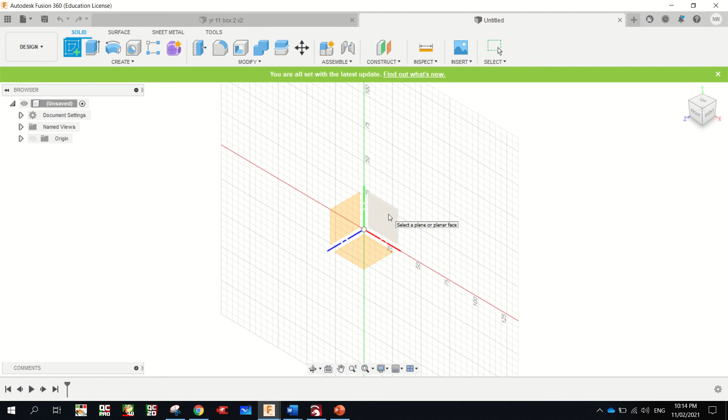So in Fusion, let's hit create sketch. I'm going to start drawing from the front view. Rectangle tool, and remember there's no click and drag, it's just click, let go of it, move your mouse in the direction you want it. The highlighted dimension is the one you can enter first. We're going to type that one in as 19, tab, and the width of our cabinet, 630 mil. Enter. Click E for extrude.

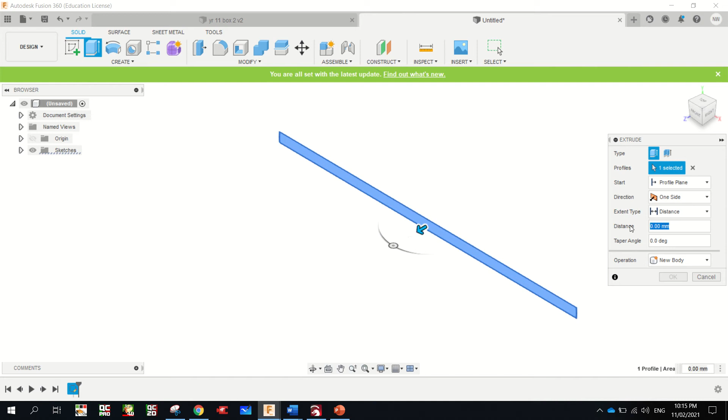Just going to zoom out. Now you can just click and drag that arrow, or you can type in the distance here, and the depth of our cabinet is 85 millimeters. Enter. Okay, that's our top piece.

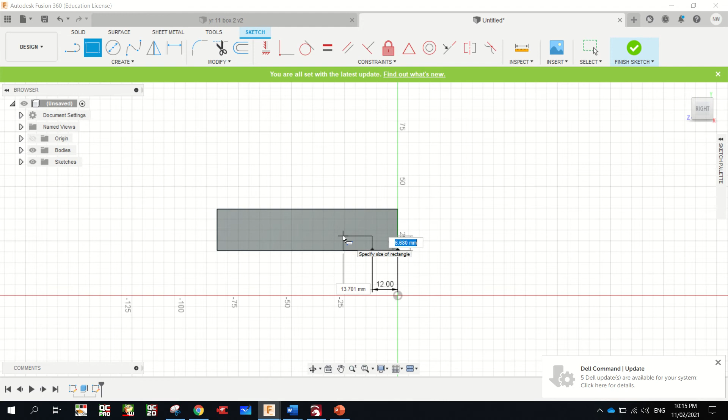First thing I'm going to do is draw in a groove that our backing board is going to go in. Create sketch, I'm going to draw on this face here. I'm just going to draw a line in from the back here, going in 12 mil, enter. And from that point there, your rectangle tool, click, I'm going to move up that way. The depth of the groove there is going to be 10 millimeters, tab, and the width is going to be 3 millimeters. Enter. Okay, I'm going to grab that line that I drew, click on it and click delete on the keyboard.

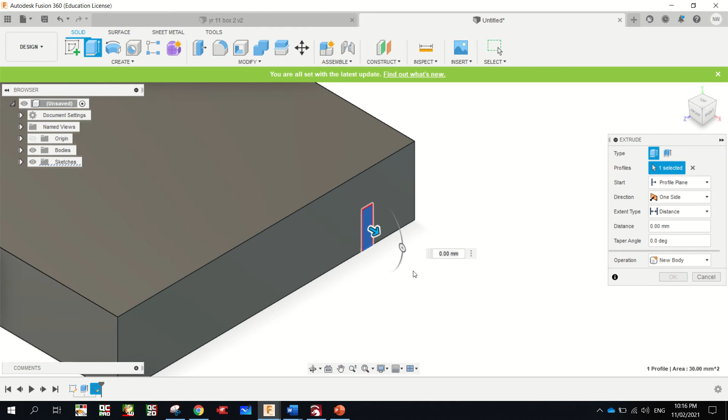I'm just going to zoom in, click on that shape there, click E on the keyboard to extrude. I'm just going to spin it side on, there we go. And I'm going to extrude it back that way. Now you can type in minus 630, or extent type here, distance. I'm just going to go all, and it should go the full distance. Click OK, zoom out, just going to spin around my shape. Now you can see it's gone the whole way through.

Okay, now this is the top piece of our dartboard cabinet, and in the top corners we're going to do a finger joint. We're not hand cutting, we're going to do it on the Gifkin.

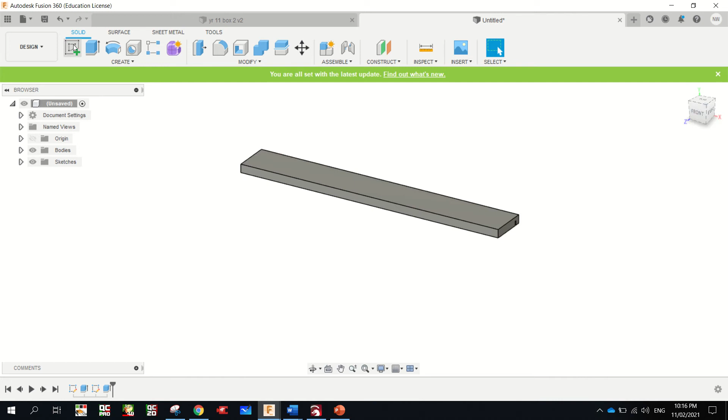So sketch, I might just draw it on the top, rectangle from there down to there, so it's the 85, tab to get to the next dimension, the width of our timber going into it, 19. Zooming in, now I'm going to go... Now the width of these in our drawing may not be exactly the same as what they are on the Gifkin, that's fine.

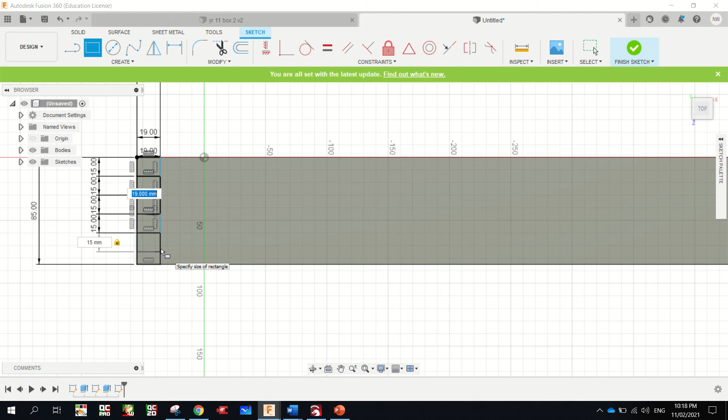So I make these about 15 mil. Enter, click, move in the direction, 15, tab, 19, enter, enter. Click, move in the direction, I want 15, tab, 19, enter, enter, locked in. 19, tab, 15, enter. Tab, 19, it's already that, so enter, enter, lock it in. You'll notice that first one's skinnier, but when we put it on the Gifkin we'll make sure the first and the last one are even, but for our drawing that's fine.

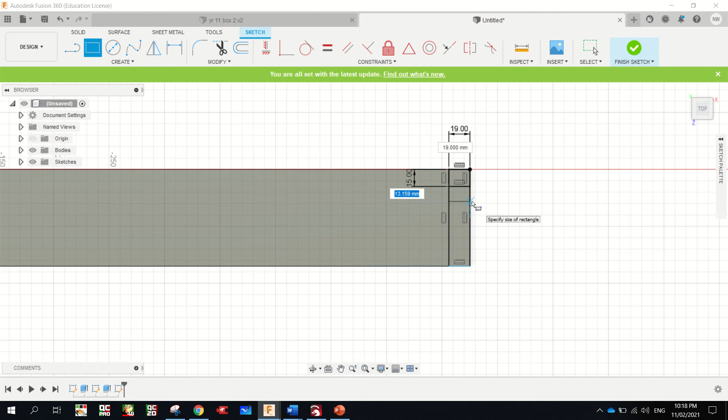Okay, I'm going to come down here and do the same thing. There, back this way, it's the 85, so tab and the width 19, enter, and we'll start drawing our fingers. 15, tab, 19, enter, enter. Rectangle, start point, go that way, 15, tab, 19, enter, click, move in the direction we want. Remember, we're not clicking and holding, it's just a click. 15, tab, 19, enter, enter, click, I've moved my mouse, 15, tab, 19, enter, click, it's gone 19, tab, 15, enter.

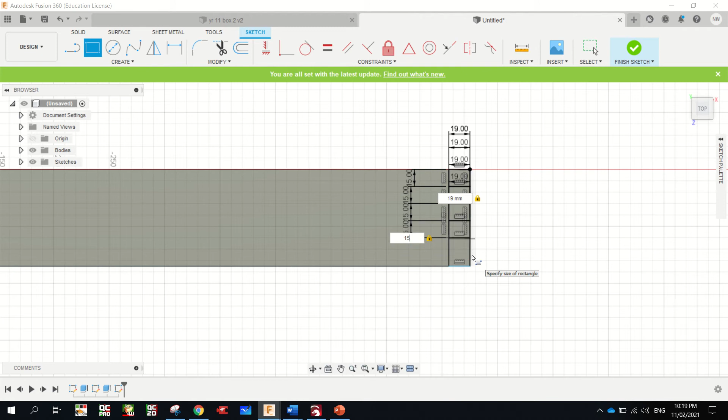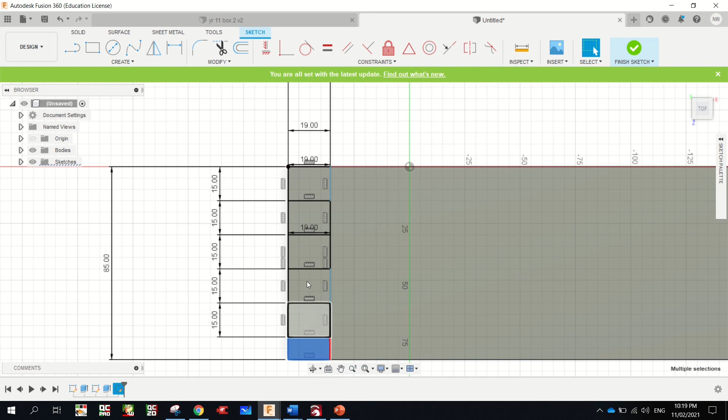Alright, now I'm just hitting the escape button on the keyboard, and I'm going to zoom in. I'm going to get that one, hold shift on your keyboard and get that one, and I'm going to get the front one. I'm going to do the same on this side. So it was that, oopsies. See what I did? Forgot to hold shift. Shift, shift, zoom out. I'm going to zoom in over here, keep holding shift. Okay, I've let go of shift now.

I'm going to click E on my keyboard. I'm just going to spin it. And I actually want to go this way. I can just type in -19 here, or just go all. Enter. Fingers are done.

Sorry, you can probably hear my dog in the background.

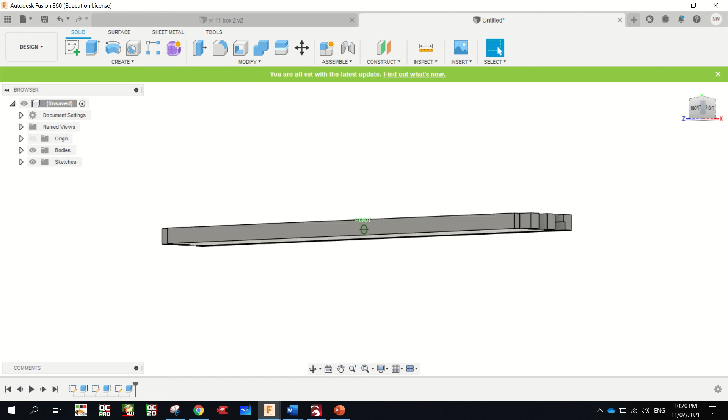Okay, top piece is done. Okay, so now we're going to have a look at the side piece.

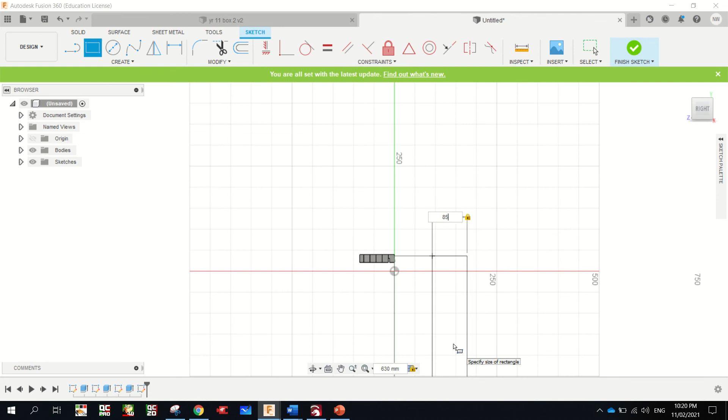So, sketch, side plane, rectangle, I'm just going to draw him out here. Now he is going to be 630 as well, tab and 85 deep as well. E on the keyboard, we're going to extrude him the thickness of our timber, 19.

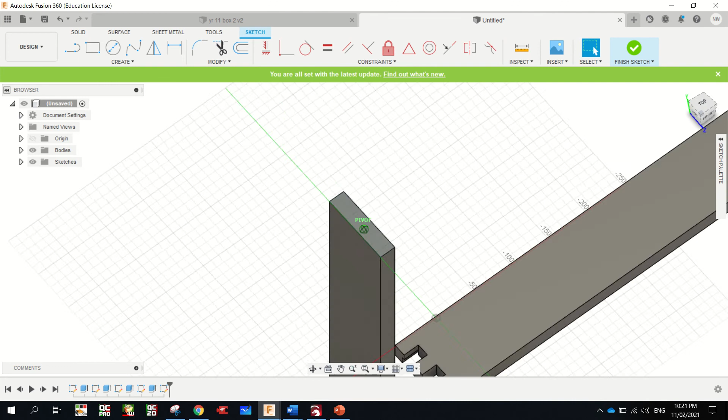And we need to draw our groove in first, to match that one that's underneath there. So sketch on the top of this piece. Oops, that made me dizzy a bit. Where's the groove? That end. Alright.

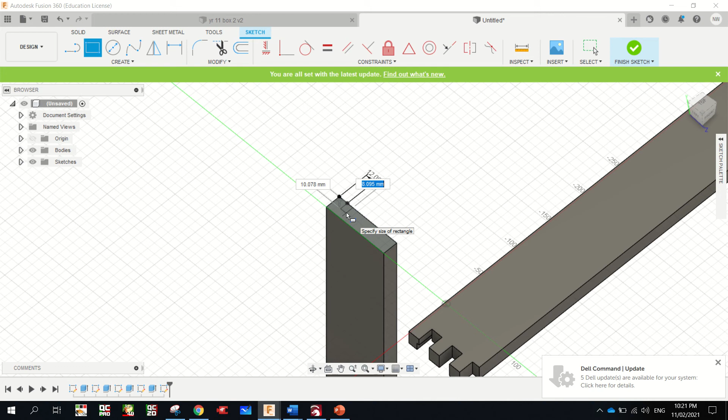Okay, line in that corner. We went in 12, enter, rectangle from here. Now he's 3 mil wide and 10 mil deep. Enter, zoom in, grab him, E for extrude.

I'm going to go that way, extent type all. Okay, done. Okay, time for the finger joints in the top.

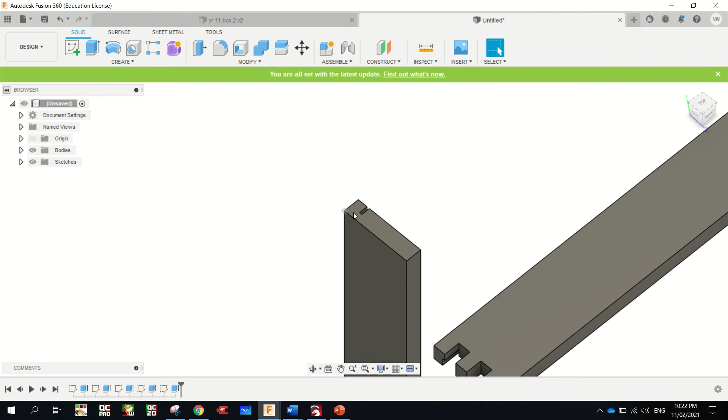We're going to start from the end where the groove is. Sketch on that face there. Start from here and we're going to go 19, tab, 15, enter. Again, 15, tab, 19, enter, enter.

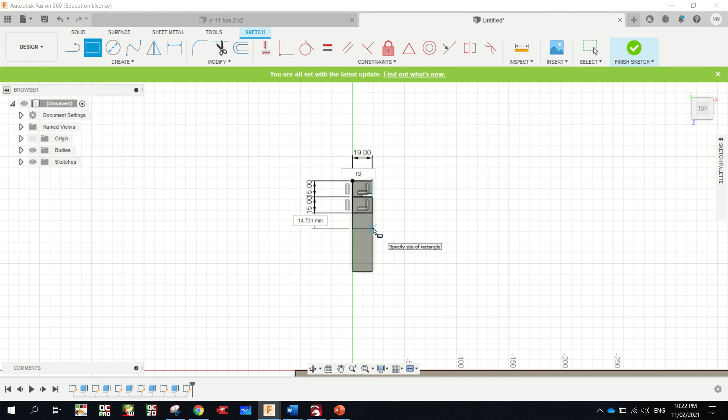Tab, 15, enter. Tab, 19, enter. One more. 15, tab, 19, enter. Done.

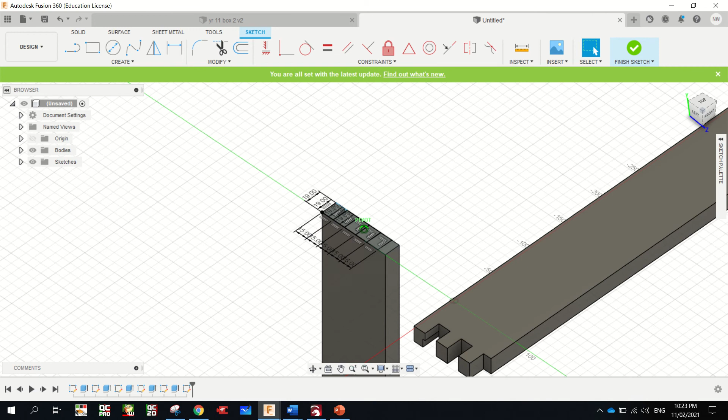Now we have to delete or extrude that one, hold shift, that one and that one. E for extrude, and we're going down the thickness of the timber, so you can type in here -19, enter. Okay, that one will slide into there.

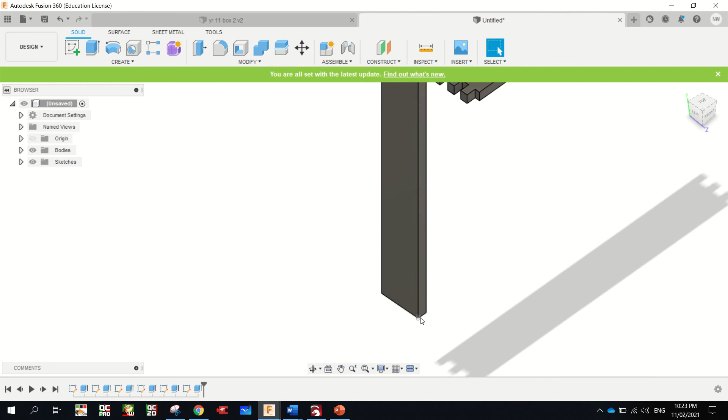We've got one more joint to do down here, and it's not going to be a finger, it's going to be a rebate. Sketch on that face there. We're going to a depth of 10 mil, tab, 19 mil, enter.

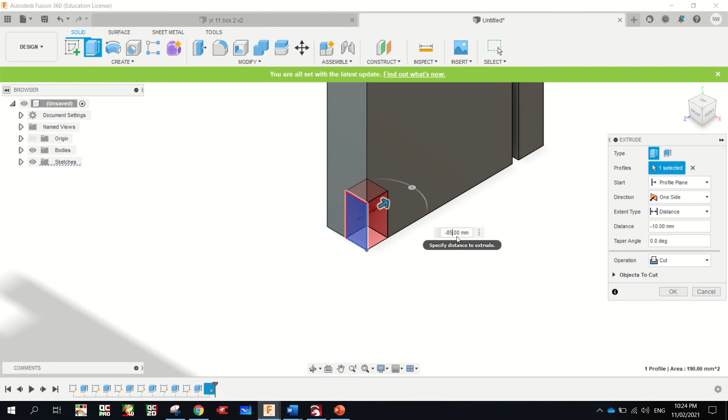Select that by clicking on it, then click E, spin it a little if you want, see the arrow, tell it we're going back that way, and it's going to be -85. You could try just going extent type all, but I'm not sure if it'll stop there, like on that line there, or there, so just go -85, enter.

That's that piece done. Now we need to draw that again, but the reverse, so quick easy way to do that, just click on it once, then right click, move copy.

Faces, no, it's a body, a selection, that. Move type, we'll just translate, which from maths you know means to slide. And we're going to create a copy. There we go.

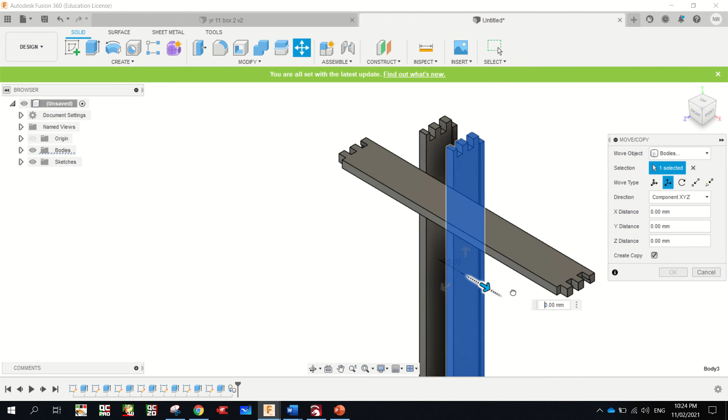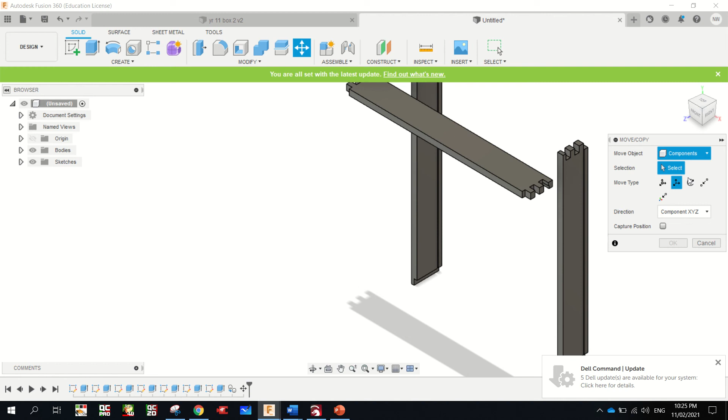Done, click OK. Now we need to spin this, and this might get a bit tricky. Right click, move copy, faces, component. Oops, not a component, sorry, it's a body. There we go. Now we can select it.

We're going to go rotate. Select the axes, we need to pick one of the ones running straight up and down. Okay, grab that dot, spin him around. It needs to be 180. You might land right on it, otherwise you can type it in there and click OK.

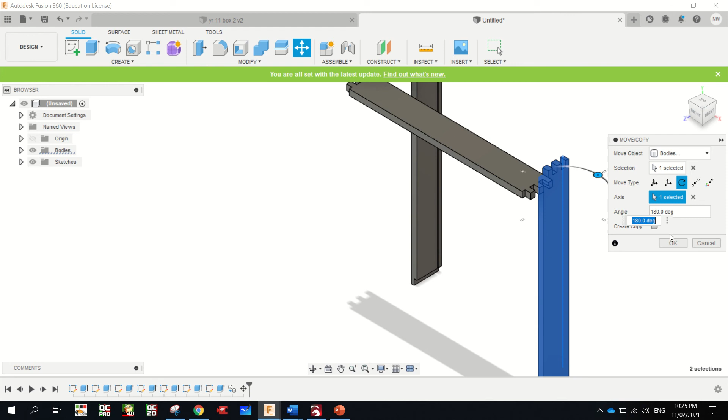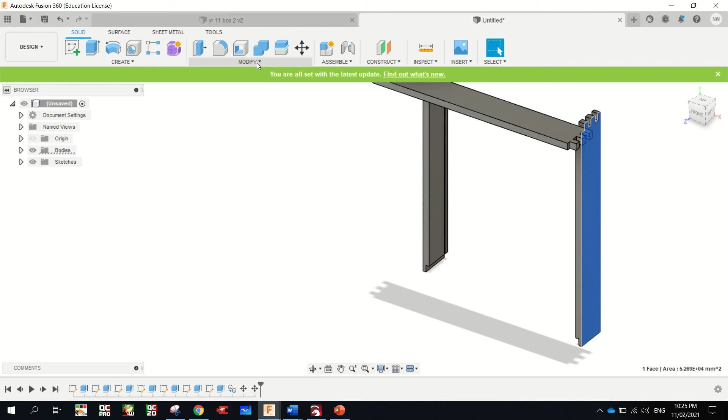Now the problem is that our groove's on the front. So, hopefully... quick way to do this. Could probably try and mirror it, but let's do it this way.

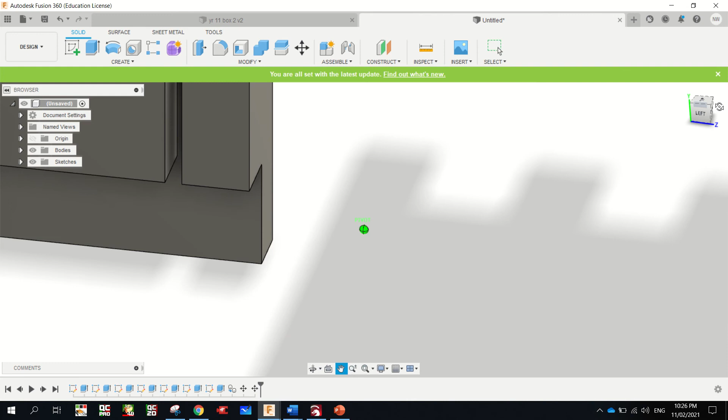I'm just going to zoom right into that groove. Whoops. Might pan across, that might be easier, just want to see the bottom of it. Ah, okay, never mind, I was just going to pull it out to match that face.

Let's do a mirror, okay, I'm just hitting escape to turn my pan tool off. Now I'm going to go create, mirror, and yep, it's a body, object, this one, mirror plane, select, and I'm going to pick that one. And I'm not going to go join, I'm going to go new body and go OK.

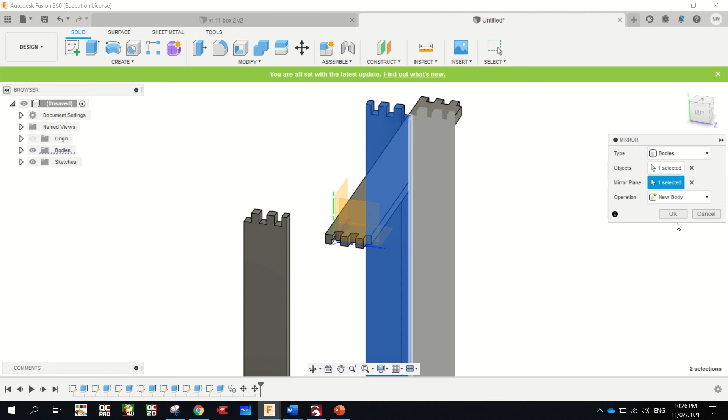Alright, now this one here, I'm just clicking on it and there's something selected in my bodies folder, it's body 3. Now I can turn that off and on. I don't need that one anymore, I'm just going to delete it. So right click, delete. Yep, delete. Whoops.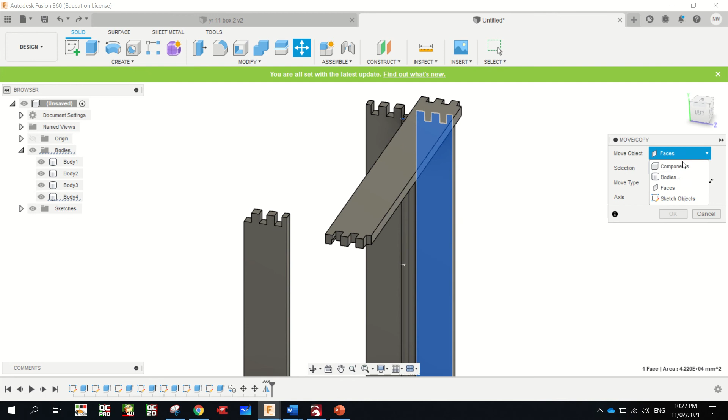Might just move this one away from it first. Right click, move copy, bodies. Move type, translate, select, it's that one, slide him that way. Alright. Click OK. Body 3, hopefully it doesn't delete body 4 as well. I think it will. Undo.

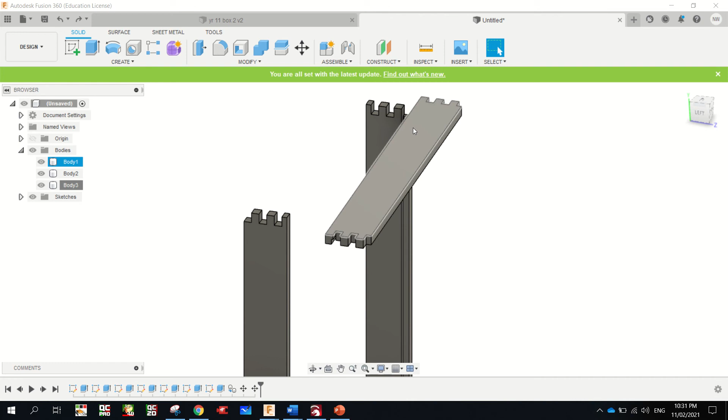Alright, I've had to think, guys. For all the messing around, I think it's actually going to be quicker to draw this one again, because if we just mirror it, it'll actually end up showing like this one that will look hidden. When we export it to make our orthographic and set of working drawings, it'll still show it up. So instead of running into those problems later on, I'm just going to delete that body. Right click, delete. Yes, I'm sure. Okay, and I'm going to draw it again.

So sketch, this view here, it won't take long at all.

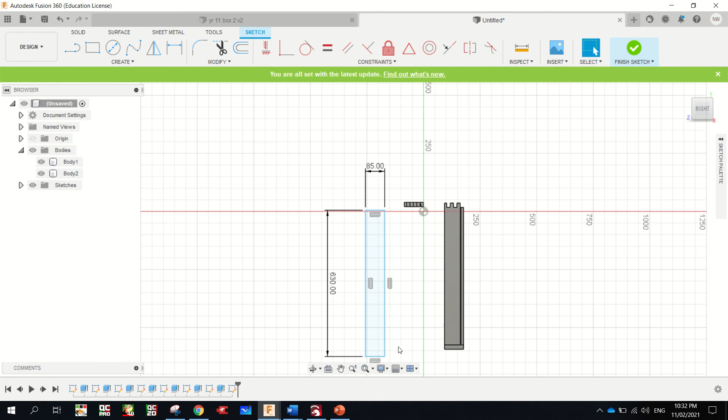Rectangle, here we go. He's 630 long, 85 wide. Extrude, we'll spin him a little. There we go, and he's 19mm in thickness.

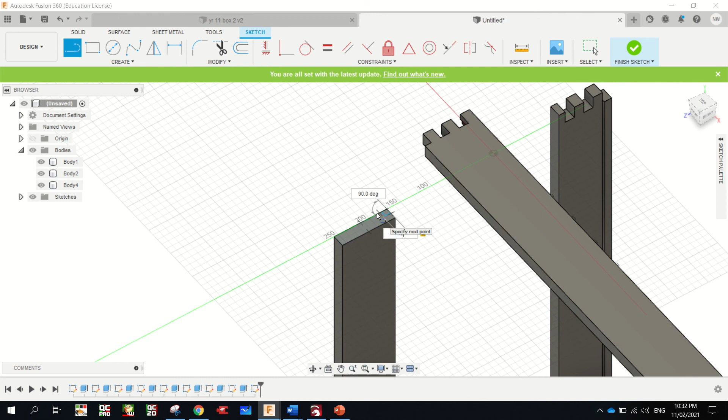We'll draw our groove on first. Alright, so I've got to get my groove on this side here, back 12mm, enter. Rectangle from here across 3mm, tab 10mm deep, zoom in, grab that, E for extrude, we're going to go down distance all, okay, and we'll start drawing our fingers on there again.

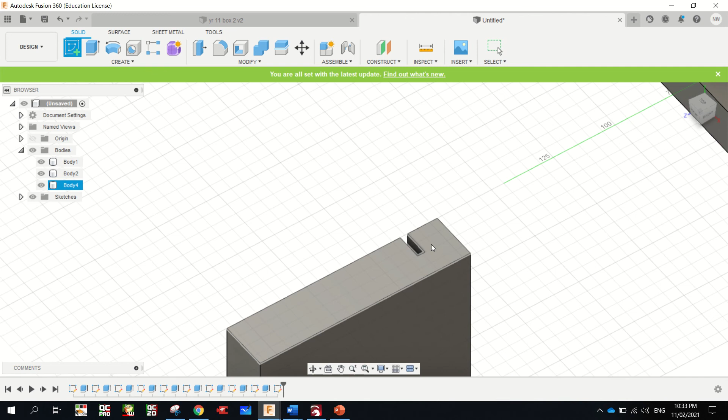Starting from the groove end. 19, tab 15, enter. Sorry if you can hear my dog again. 15, tab 19, enter.

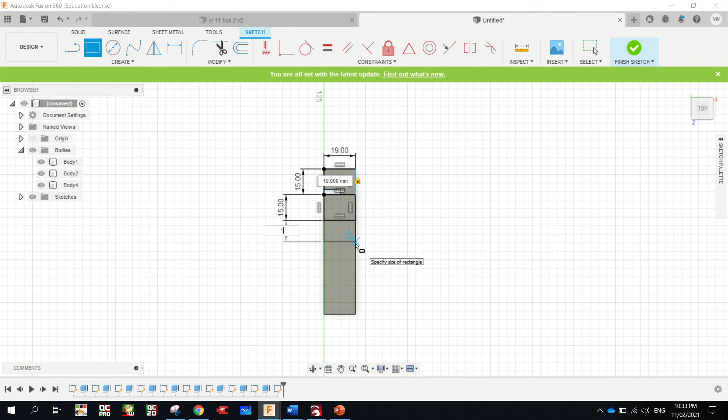Oops, I'm on line. Rectangle. 19, oops. Yep, that's fine. 15, enter. Rectangle. It's the highlighted one first, so 15, tab 19, enter. One more. 15, tab 19, enter. Check which one we've got to get rid of.

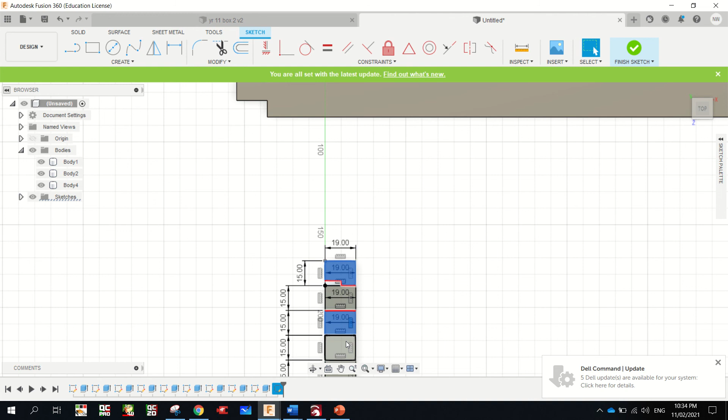We've got to get rid of the first one. That one. Shift to multi-select. Zoom out. Shift, E, just spin him side on. And we want to go back that way, a depth of -19. Enter.

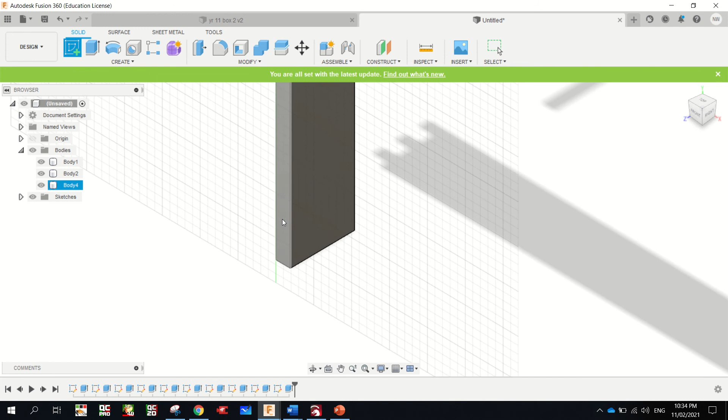Home view. Alright, and now I've just got to draw the rebate on. Sketch. This time from this corner. Depth of 10, then 19. Remember, tab to get to the other dimensions. Enter.

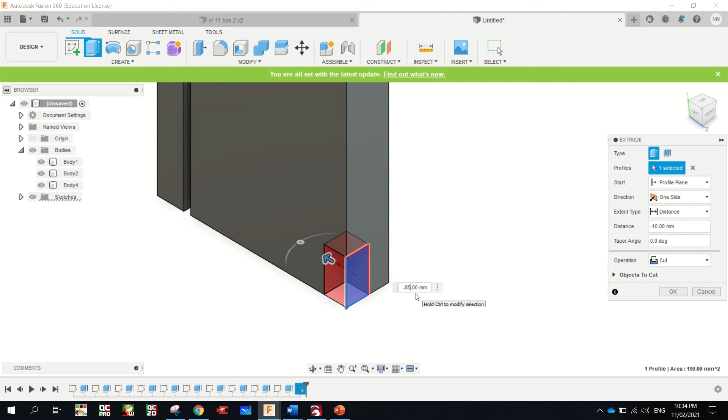Click that. E for extrude. You can spin him side on. Drag him back, depth of our cabinet there, -85mm. Enter. There we go. That didn't take too long at all. Okay.

Now we've got one more piece to draw. But first I'm going to put these three parts together. So just remember, go to your bodies folder, right click on the heading there, create components from bodies. There we go. Always have to do that first before joining things together. And I'm going to go click on that, then right click, move copy.

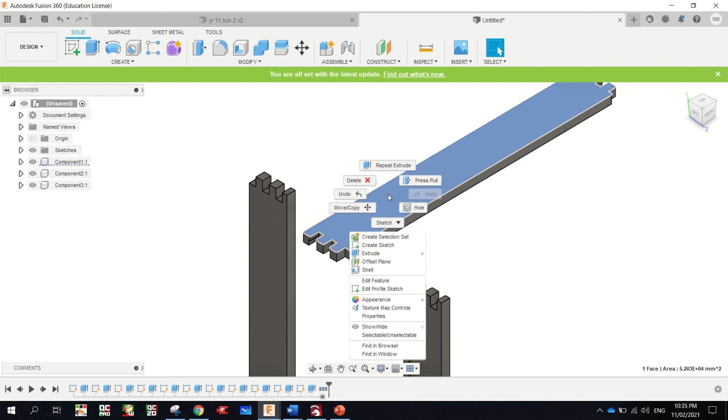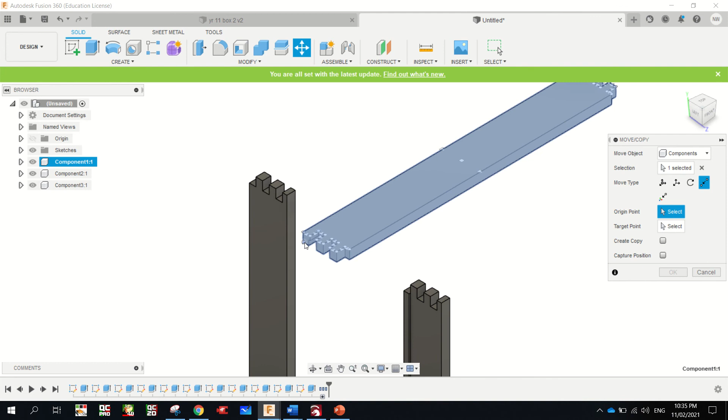It's now a component. I'm going to go from point to point, origin point. I'll just say that bottom corner there is going to line up with that corner there. Better. Origin point from that point there to that point there. Looks good. Click OK.

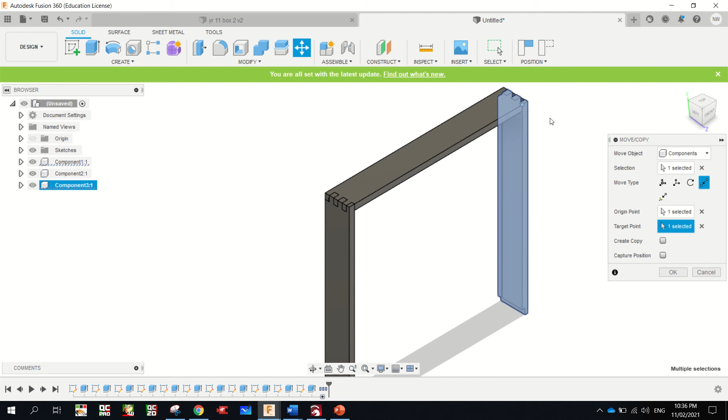Alright, same one for this one. Click on it, then right click, move copy, change it to components, select the one you want to move. It's point to point, origin point. I'll go from there, and that should line up there. Zoom in, yeah, looks good. And click OK. And just check your grooves line up, that you haven't drawn one on the wrong side.

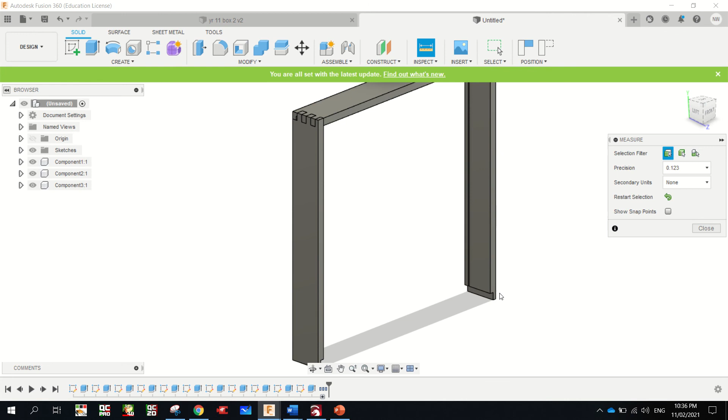Okay, now we're going to draw the bit that just sits in the bottom here. So you can probably figure out the length in your head, but otherwise go to inspect and measure. And we go from that point there, escape, to that point there at 612mm. Okay.

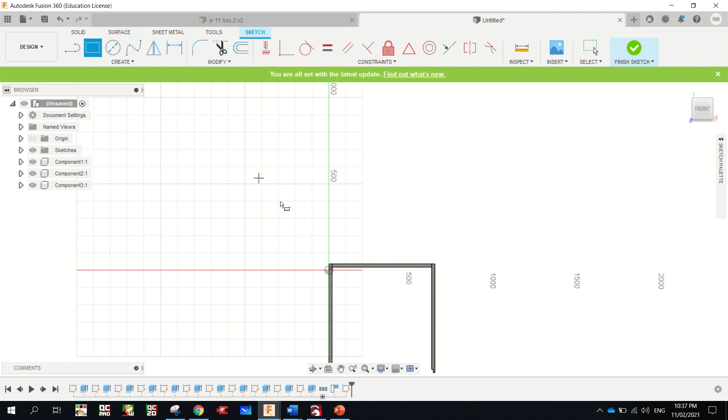Close. 612. Front view. Capture. Always click capture if this ever pops up. Rectangle, doesn't really matter where you draw it. It's 19 thick. 612mm. Enter. Zoom in, click on him. Click E on your keyboard.

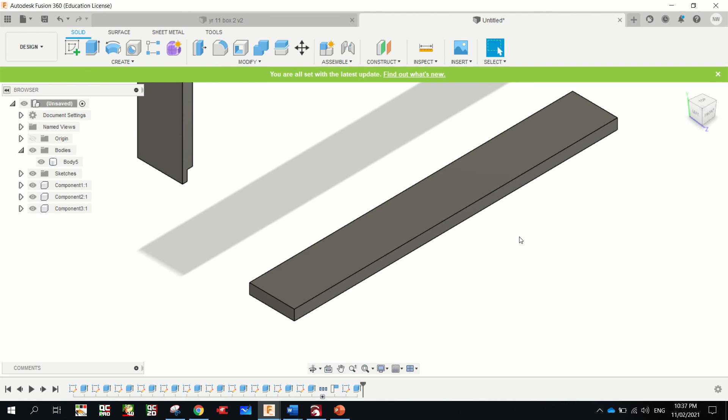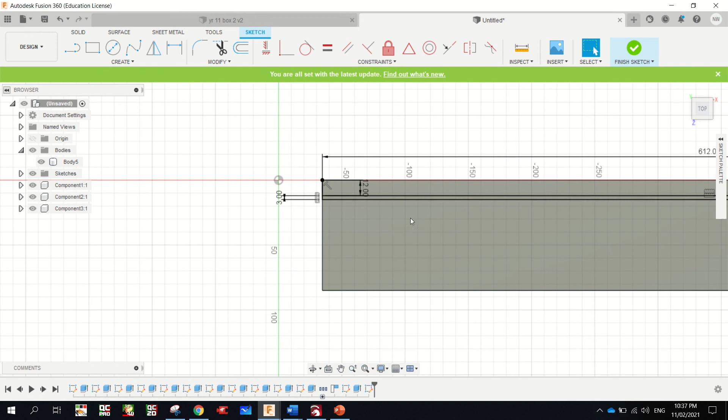You can spin him side on. Just pan across. There it is. Escape, turn off pan. Now we're going back that way. Hey, look at that, perfect, -10. Click OK. Alright, that's ready to go in. Just going to click home. That's better.

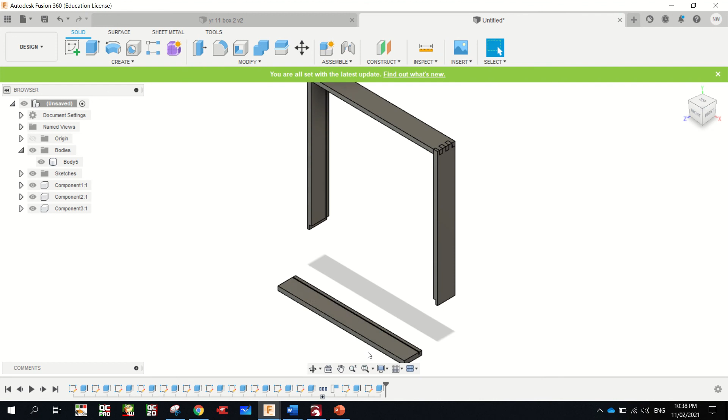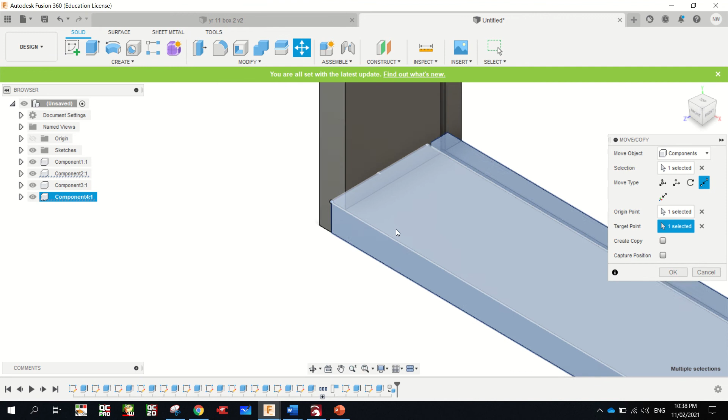Here's a body still, so right click, create component. Click on him with the left button, then right click, move copy. Use a component. Select him. Point to point, origin point. I'll just go for that corner to line up with that one. Just zoom in and make sure you got it right. Yep, grooves all line up, that's good. And click OK. That's the carcass of our dartboard.

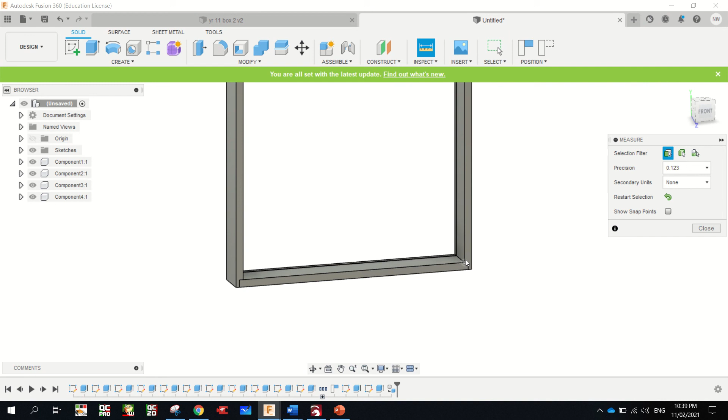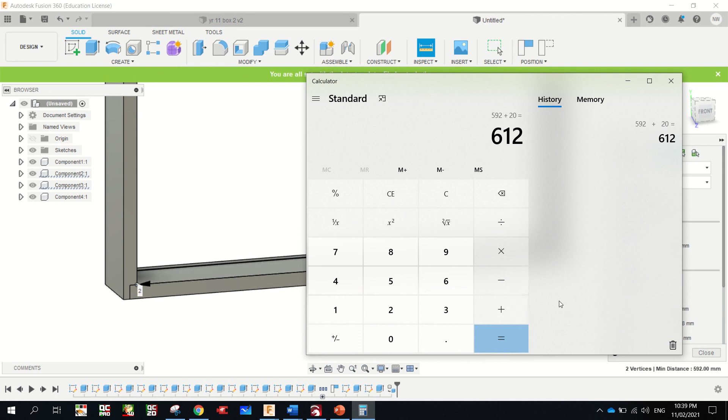What's left to do now is cut our ply, well, draw our ply that will go in there. Okay, now I'm going to measure again, inspect, measure, and go from that point to that point. So 592, and we know the depth of our groove is 10mm each way. So if you grab your calculator out, 592 plus 20 equals 612. Easy. Okay.

So, sketch, front view, capture.

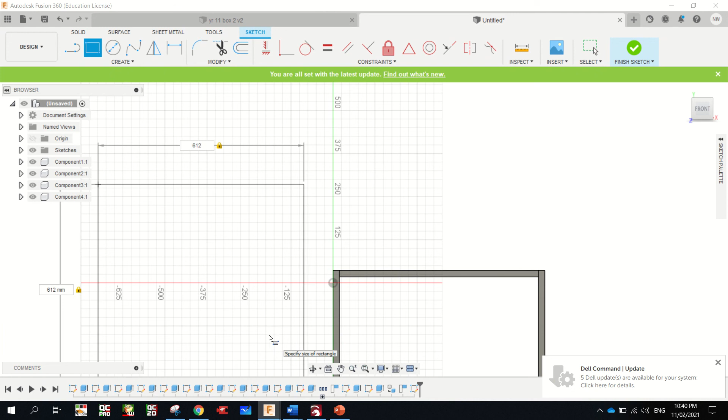We want 612, tab 612, enter. Select him, extrude. You can turn him side on if you want to, and he's going to be 3 mm.

Now this is a little bit tricky. We've got to get him into that groove. Okay, convert him to a component. Done.

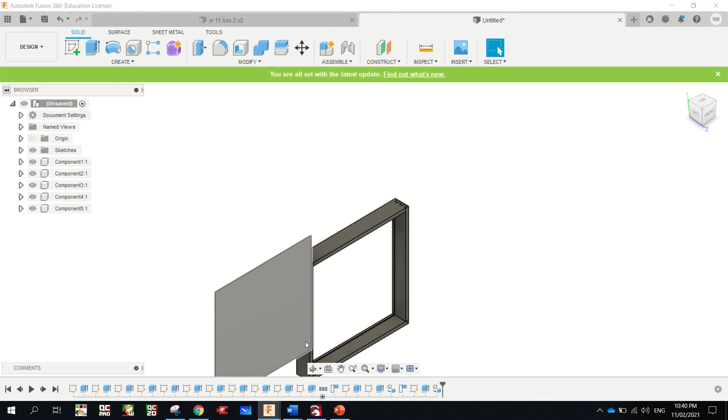Now right click, move copy, component. Select him. We are going to go point to point to start with. Alright, now origin point. I'm just going to go to this front corner here. And I'm going to align him to there. I know that's not right. Okay, click OK. Now I have to do it again 2 more times.

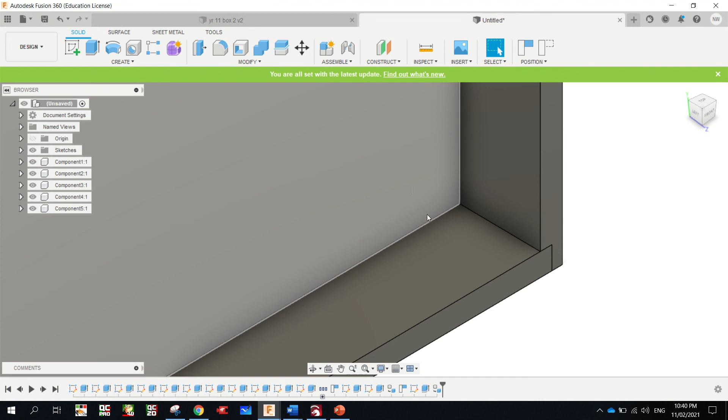Right click, move copy, component, select him, that one. I'm going to translate this time.

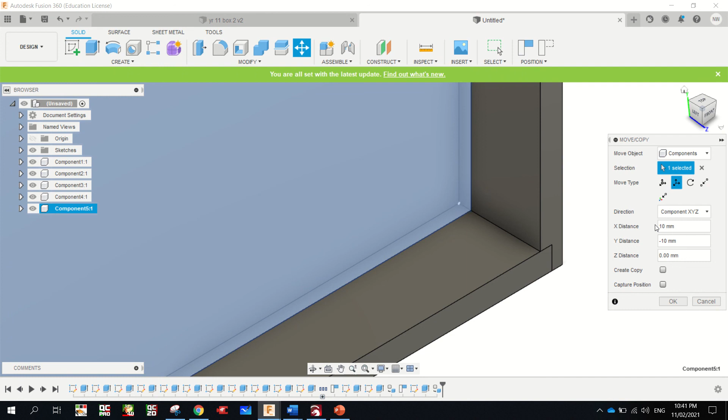Now I'm going to move him downwards, so I'm going to go to this widget. Down should be Y, so see how Y runs up and down? It's got the Y at the top here. I'm going to go to my Y distance and go -10, and my X distance, which would be out that way, and that should be 10. Yep. Click OK. That's in there perfectly.

Now, I want to talk to you about this gap at the back. I left this little 12 mm ledge the whole way around the back because we're going to put a bit of timber in across here that'll secure into our side pieces so that you can hang this on a wall. If you were just to screw it in from the ply, it could peel off the back of your cabinet. The ply would be stuck to the wall, but your cabinet would fall down. That's not ideal. Okay?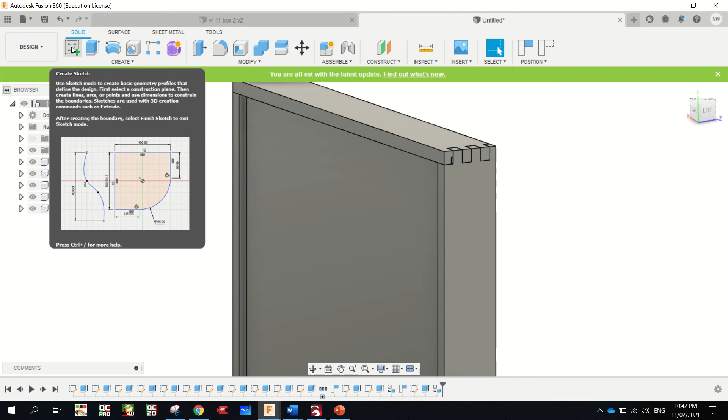I don't think we'll draw that on. I think we'll judge that when it's made, based on where the dartboard would hang from. Okay, but just know that we're going to have a through housing in here with 2 screws in it. It's probably the only time we're going to use screws in our project.

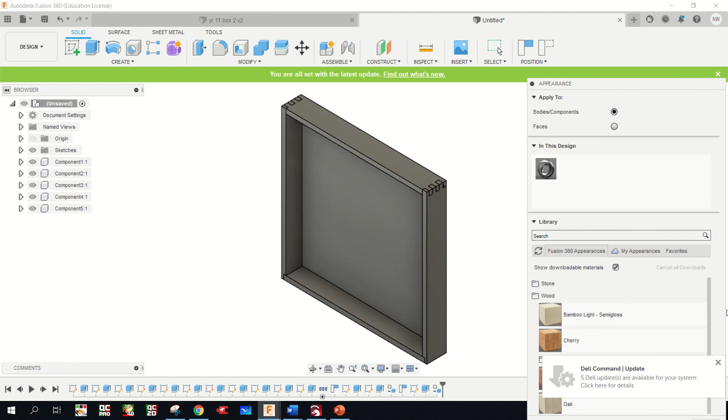Okay, there's our cabinet. Now let's put some appearance on it. So click A on your keyboard. Now if you're planning on painting this a colour, in your appearance folder here, inside your library, which might be closed, you might just choose to come up to the colours folder. Ooh, I think that paint maybe.

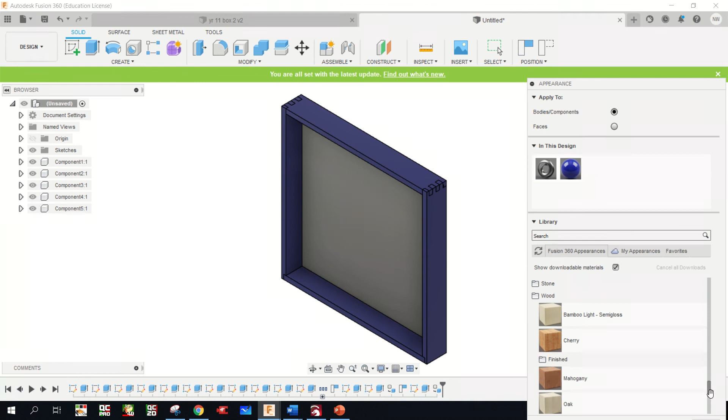If you think you're going to paint it blue, you might just go, oh, I'm going to paint it blue. If you're going to paint it white, you can put a white on it, or if you're just going to put a clear finish on it, you can go to the timber folder. Okay, and just drag the pine look onto it.

Now the other thing that's going on the inside of here, I'm just going to close the library and then hit close. We've got some cork board going in there. So we're going to draw that on.

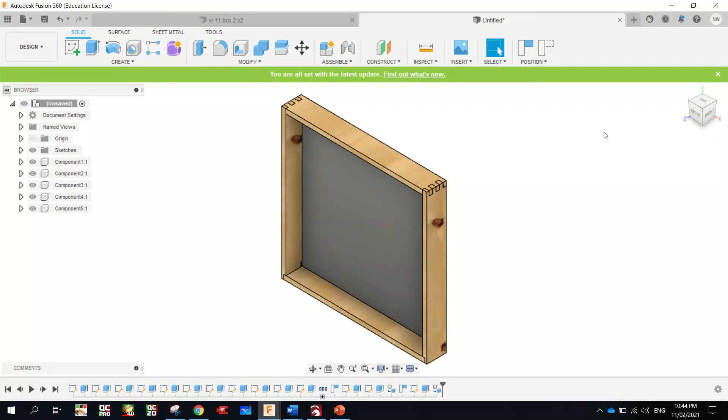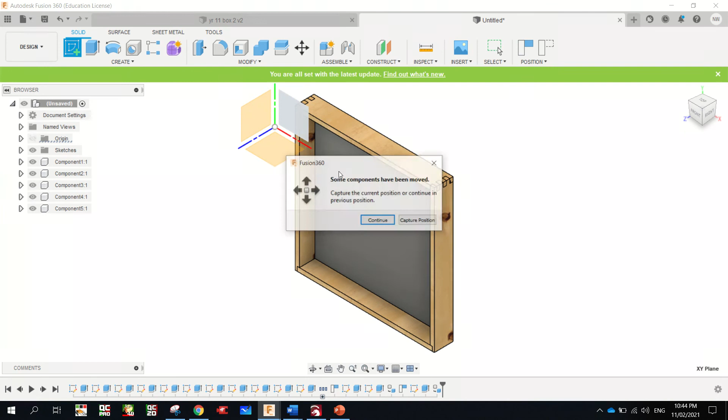Take a measurement first, just to double check. 592 by 592. Sketch. That plane there, capture. Rectangle. 592 tab. 592. Enter. Extrude. And our cork board

is 6 millimeters thick. Now it's not in that perfect sheet size, it comes in smaller squares, so we'll cut it to fit and glue it on with some contact bond.

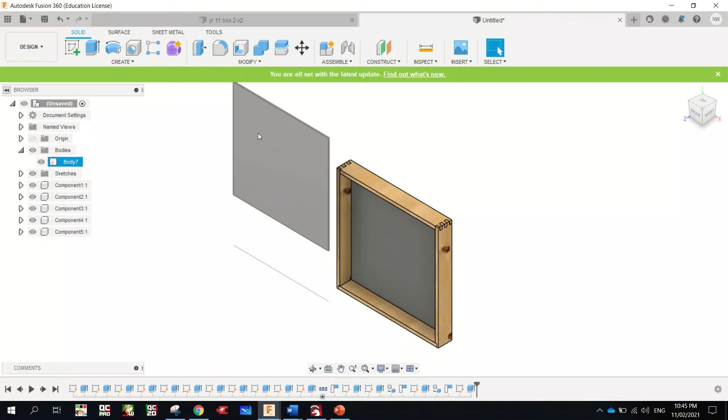Now we're going to put the appearance of cork on here. Now I highly doubt there's a cork in the appearance. I'll have a quick look just in case.

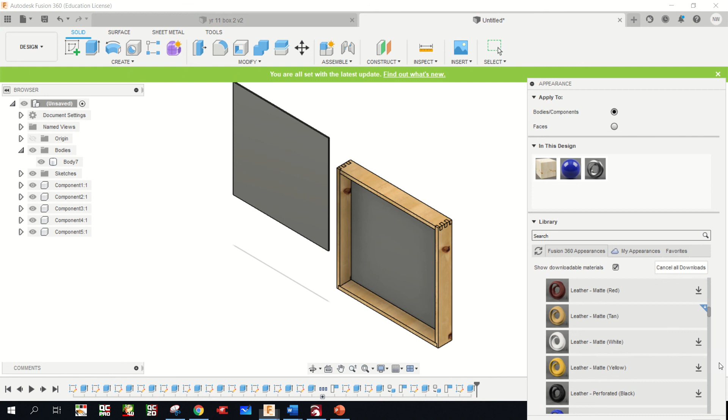If there's a texture you want to use and it's got this symbol here, you just click on it, it downloads it into your folder pretty quick. It's not a leather or cloth, but might have something similar. See what this looks like. Oh, I've got to download it. It'll do.

Okay. So now I'll make that a component. Whoops. Make it a component. Done. We can move him in.

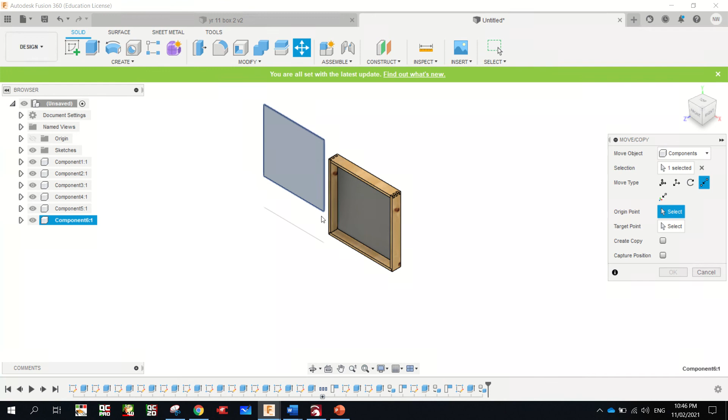Component, select him. We're going to go point to point again. Now, I'll have to line up a back corner to sit in there. So I'll get that back corner, and I'm going to spin. Zoom out. And I'll zoom into that corner there because that's where he should line up to. And click OK.

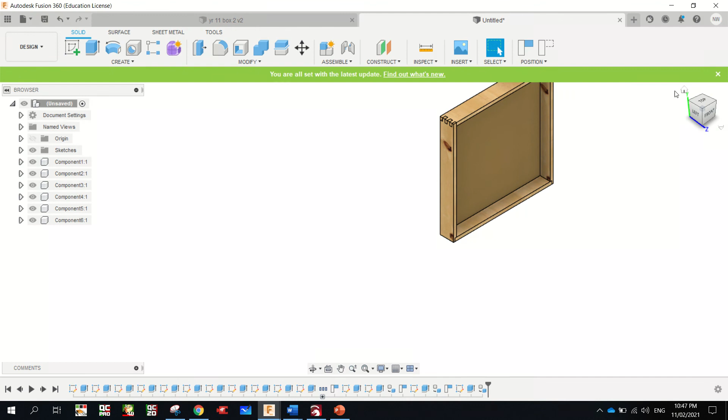That's the first part of our dartboard cabinet. Okay, I think that's enough for this first lesson, so hopefully get that far with our drawing. I think the next parts we'll draw in another lesson will be our doors.

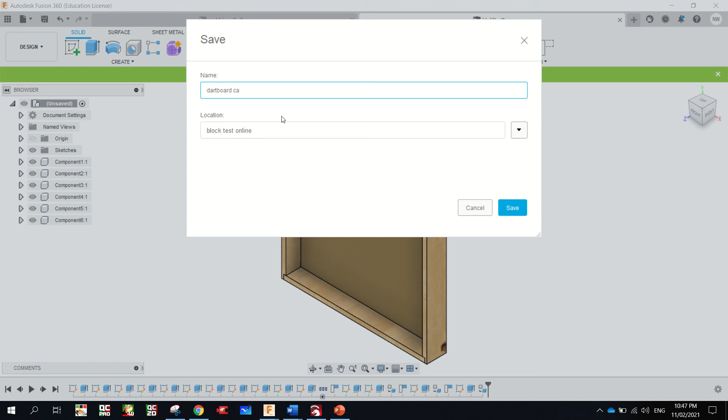And in class, an addition we're going to put in here is a little timber strip across the top to hide our LEDs and our batteries. Oh, she's noisy. Okay.